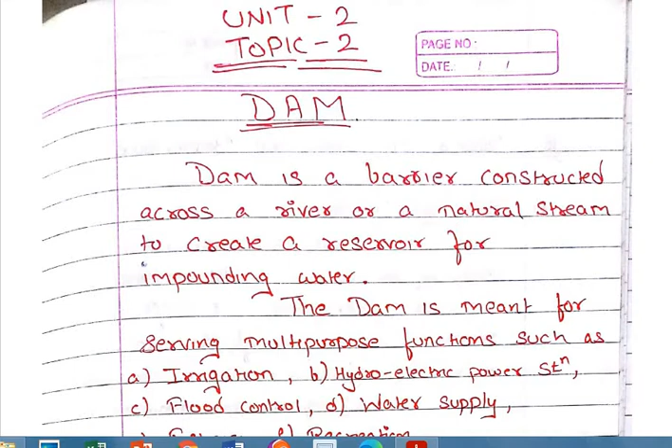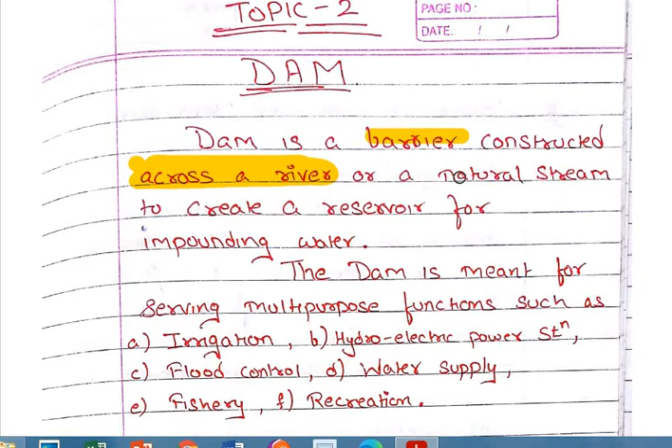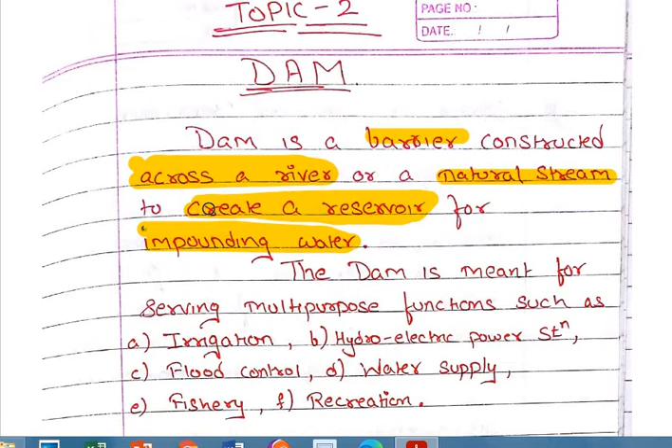I think all of you must know what a dam is. A dam is a barrier which is constructed across a river or natural stream, for the purpose of creating a reservoir for impounding and storing water.

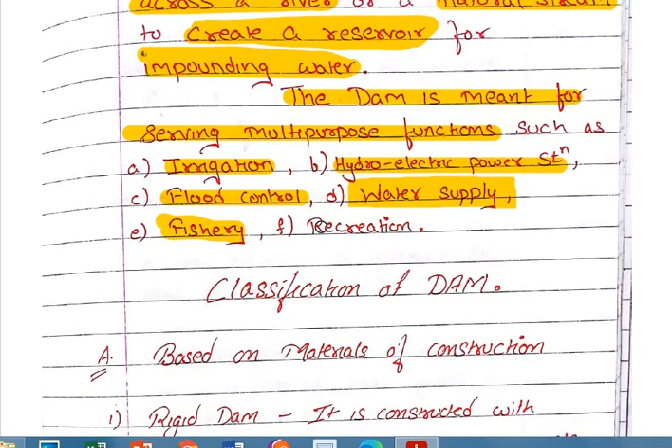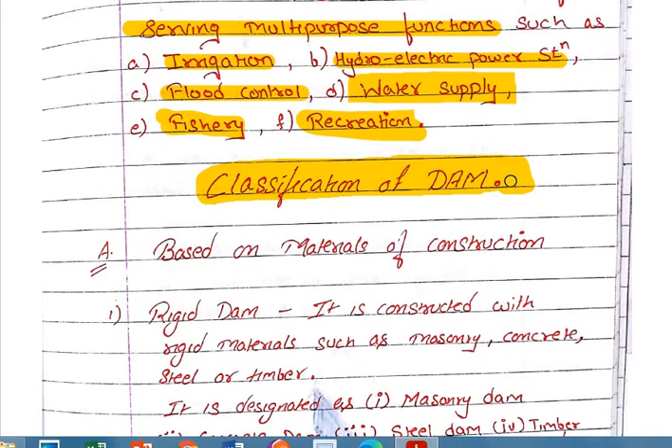Based on material of construction, dams can be rigid or non-rigid. A rigid dam is constructed of masonry, concrete, steel or timber - a solid wall made of planks, steel, concrete or masonry. These dams are called rigid dams, and can be designated as masonry dam, concrete dam, steel dam or timber dam.

I can show you some pictures related to this.

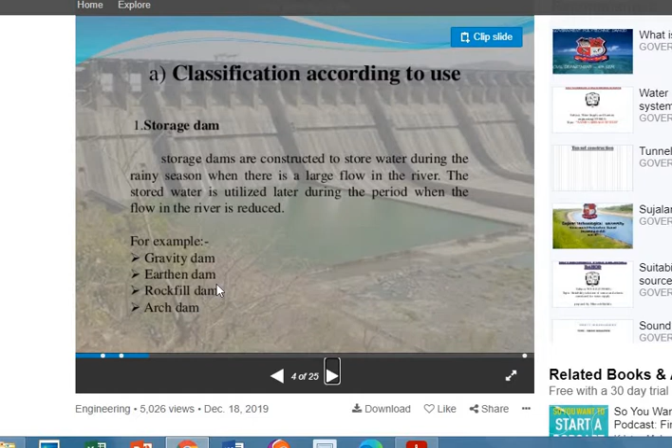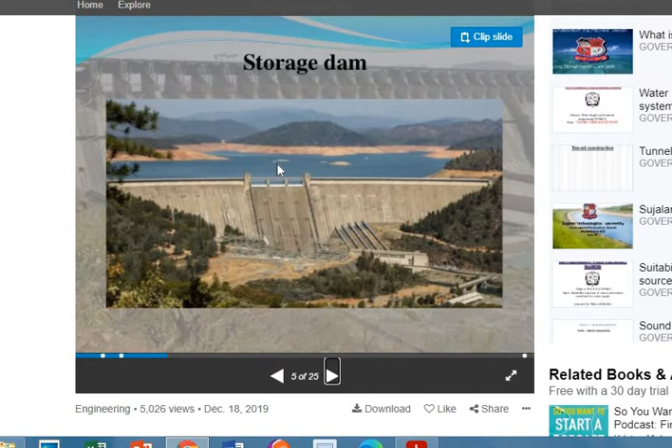So this storage dam is called a gravity dam, which is constructed across the width of the river to store water at the upstream side. As you can see here, this is the concrete dam, also called a rigid dam, constructed across the width of the river to store water on the upstream side.

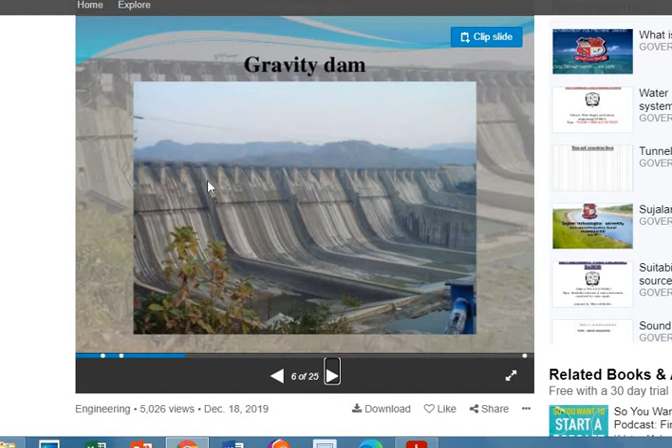See, this is also an example. Here you can see the spillways. This is the downstream portion, and the portion at the other end is the upstream portion, where there is a river which is obstructed and the water in it has got stored.

If you want to release the water, you open these gates. There are gates available. You open the gates and allow the water to fall through the spillways and then into this canal. I hope it is clear to all of you.

This is an earthen dam, which is constructed of earth, and this is a gravity dam, which is constructed of concrete. This is an example of a gravity dam.

Now you can see the earthen dam, where you can only see that there is a slope created at the head of the river, to store the water in this region. When this earthen dam has been created, when there is a river with a minimum flow to be obstructed, or when there is a lake, you can call it a stream. When there is a stream with minimum flow which needs to be obstructed, you create such dams to hold back that limited amount of water with this slight slope, which is either made of earth, or with the help of bricks or checker blocks.

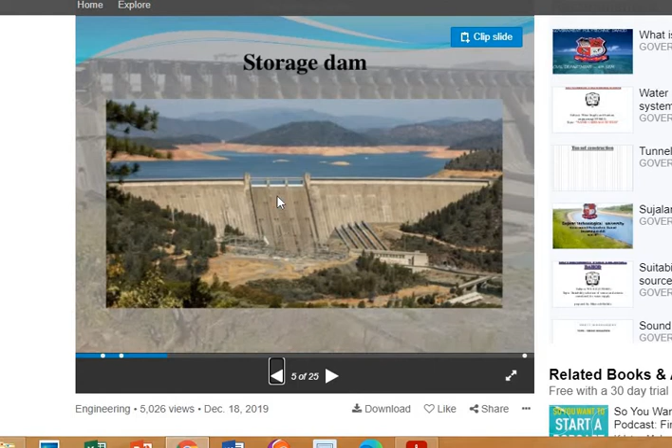Here you can see a dam constructed. This is the gate from where the water is falling at the downstream portion, over the spillways. But hardly can I see the spillways here, as it is clearly visible in this picture, and in this picture, that the water is sliding over the spillways.

In this arch form, there is a geometrical difference between a normal gravity dam or concrete dam and an arch dam. What is the geometrical difference? When you see the simple gravity dam or concrete dam, it is perpendicular to the flowing water, where the water pressure is directly perpendicular to it.

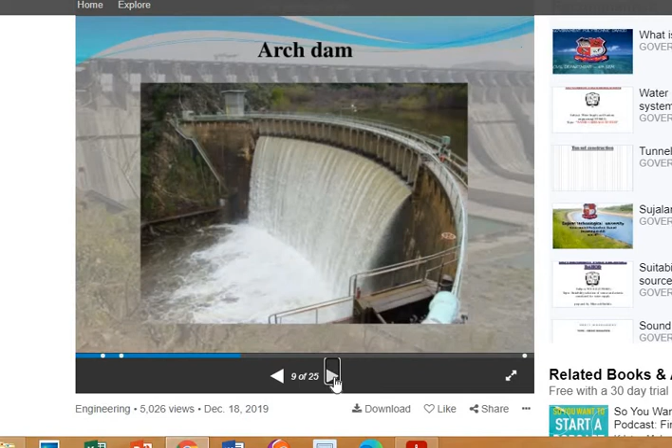Now the diversion dams are weir and barrages. Now what is this weir and barrages? Let's see. A diversion dam is constructed for the purpose of diverting water. What is this diversion dam? Storage dam was for storing water. Diversion dam is for diverting the water of the river into an off-taking canal.

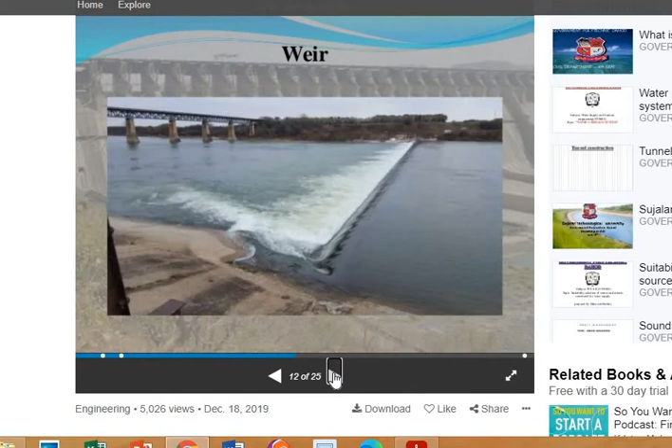As you are diverting the water, you are controlling the flow of the river, right? You are making a part of the water get diverted to other streams. So not only are you diverting the water, but you are also controlling the flow with the help of this weir and barrage. Now the difference between weir and barrages. See, actually, there is hardly a difference between a weir and a barrage. I can show you over here.

Both terms are used in irrigation engineering in conjunction with storage and regulation of water. A weir is a means of stopping the flow. Weir is used for controlling the flow in a water stream. It could be any impervious layer constructed with earth.

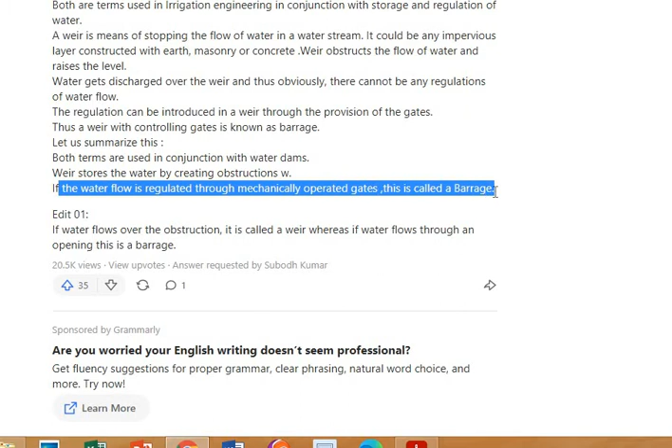of flow, whereas in a weir it is just a height that is controlling the flow, and if the water is going beyond the height, it is simply getting overflowed. Okay, so a weir with a gate is known as a barrage. If the water flow is regulated through mechanical gates, then it is called as a barrage. I hope it is clear to all of you students. So let's come back to our notes only.

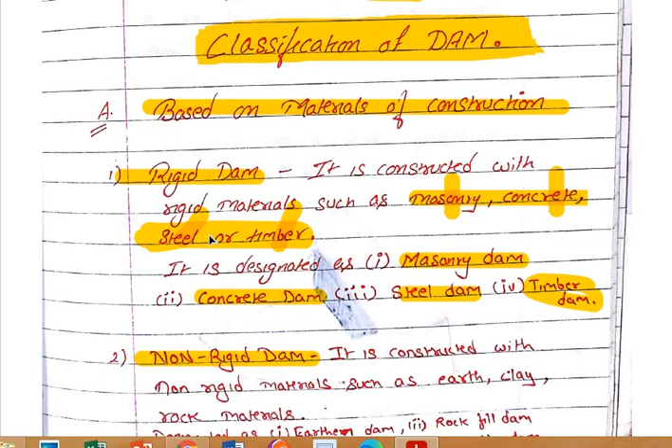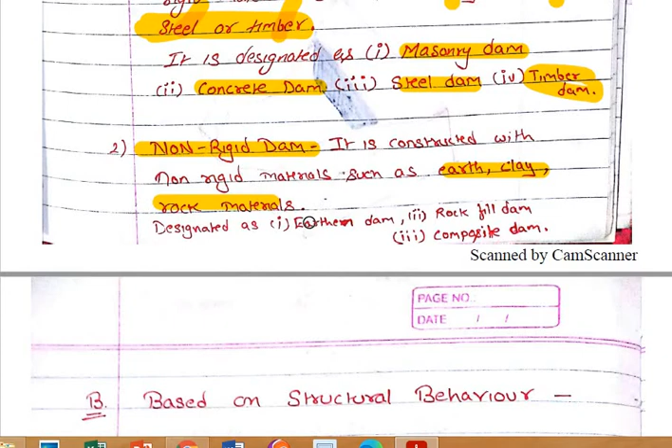So a rigid dam, बात हो गई है. Constructed of masonry, concrete, steel or timber, can be called as masonry, concrete, steel dam or timber dam. Non-rigid dams are made up of earth, clay and rock materials. Can be called as earthen dam, rockfill dam, composite dam. Okay. पहला क्या देखा हमने? Based on material of construction. Now based on structural behavior. ठीक है.

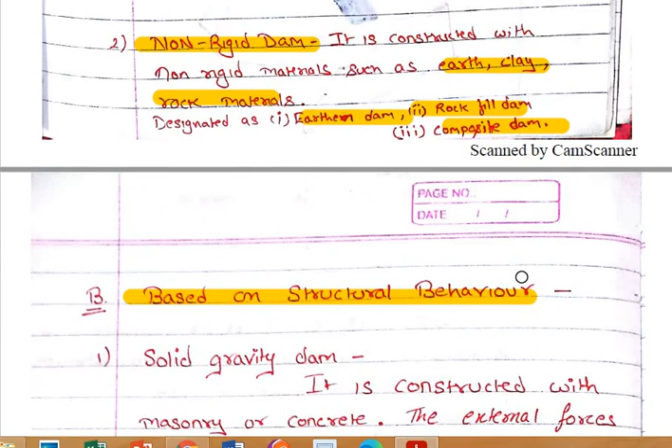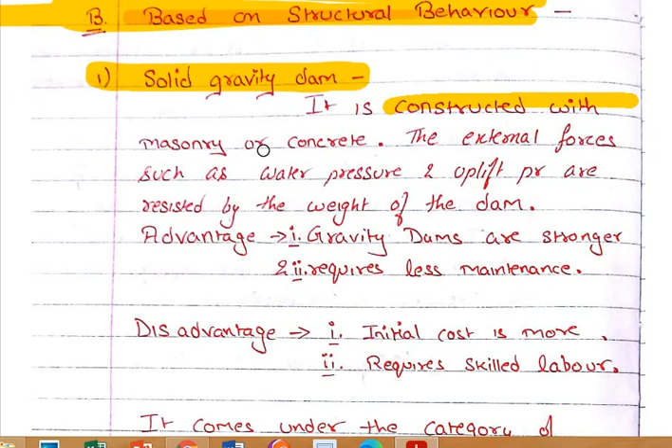Very first is solid gravity dam. It is constructed with masonry or concrete. ये हमारी बात हो चुकी है. Concrete dam को हम solid gravity dam भी बोलते हैं. The external forces such as water pressure and uplift pressure are resisted by the weight of the dam. आपको तो पता है कि वाटर प्रेशर कैसा आता है, अपलिफ्ट प्रेशर कैसा आता है. You have already discussed it in your advanced concrete structures. So uplift pressure and water pressure are resisted by the weight. जो कंक्रीट का वेट होता है उससे रेजिस्ट होता है.

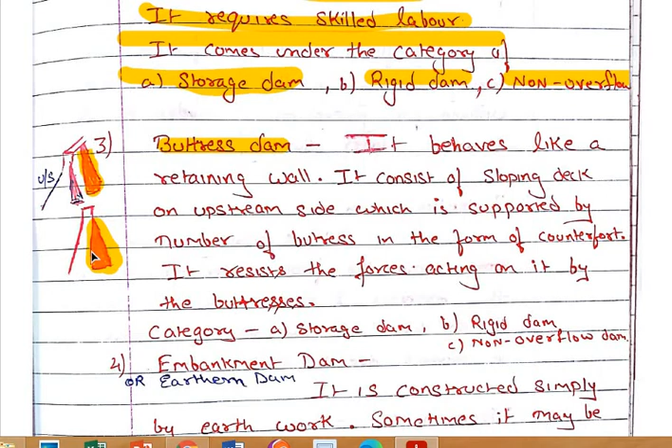An extra element of concrete RCC is constructed at the piers at the downstream side to give the stability to the dam.

It behaves like a retaining wall. देखिए, it consists of a sloping deck on the upstream side, which is supported by a number of buttresses. यहाँ पे sloping deck होता है, जो इस पर प्रेशर आता है, water pressure, is supported by this buttresses in the form of counterfort, जैसे कि counterfort retaining wall होती है.

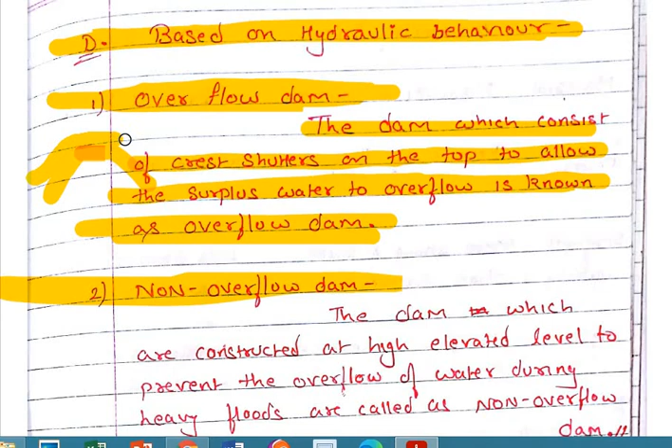The dam which consists of crest shutters to allow the water to overflow through the dam is known as overflow dam. Non overflow dam: the dams which are constructed at high elevation level to prevent the overflow of water during heavy floods are called non overflow dams. I hope clear हो गया आपको ये.